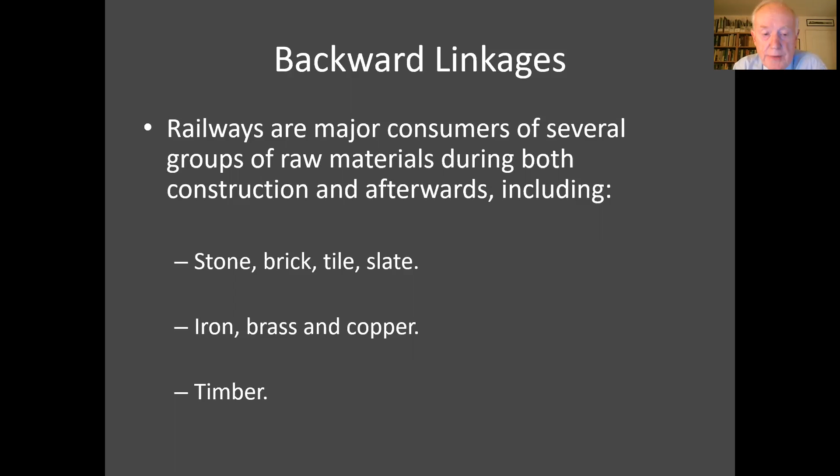Obviously, to an audience of railway engineers and other engineers, the next few points will seem very obvious. These slides were ones which I used for a lecture to a lay audience some months ago.

Just to run through very quickly the sort of uses to which timber was put, mainly up to the First World War. I could have added as a subtitle to this talk that I'm mainly talking about the period up to 1914, 1918, or the grouping of 1923. But until the First World War, railway carriage bodies were built principally of timber, with under-frames switching to iron or steel at a rather earlier date. So you get oak frames, pine or teak cladding to railway carriages, and then the use of small but relatively expensive quantities of hardwoods, decorative hardwood veneers, inside carriages, particularly first-class carriages or special carriages.

Likewise, on a greater scale but less glamorously, the majority of wagon underframes for at least the first 30 or 40 years of mainline railways were built of timber. Gradually, iron or steel replaced timber in underframes, but the Railway Clearinghouse was still issuing a model drawing for a timber wagon underframe up to 1923.

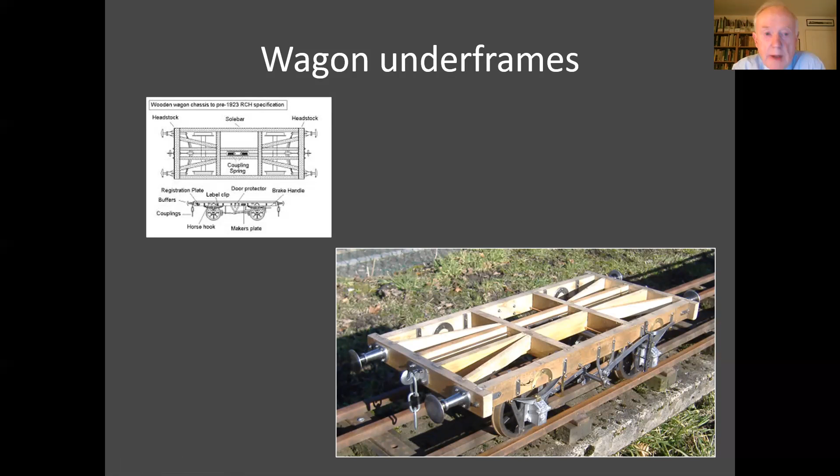The superstructure of wagons was again predominantly timber until well after the First World War. In fact, you had hundreds of thousands of open wagons built - 3, 5, 7 plank wagons - using normally 2-inch pine as the planking material.

Different kinds of covered wagon, covered van also used timber for panelling, again usually pine panelling over an oak frame, even if the underframe had switched to channeled steel as a method of construction.

More commonly, signal boxes were either built entirely of timber framing with timber cladding, or in some cases the ground floor was built of brick or stone, but the cabin itself was built of timber. That's an almost completely new industry - there is no real parallel before the railways arrived for using timber framing for these kind of line-side buildings. The next slide gives some more examples.

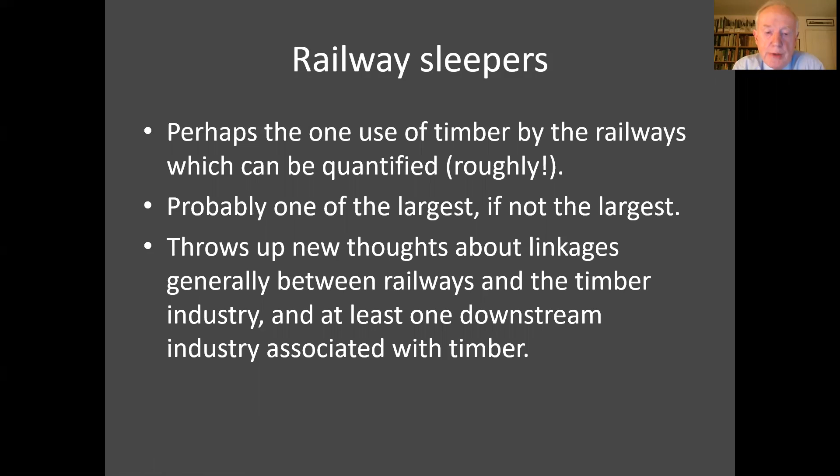Sleepers may be the largest, if not the largest, use of timber by the railways. This does throw up new thoughts about linkages between the railways and the timber industry, an industry which expands greatly in the 19th century. I'm also going to bring in towards the end one downstream industry associated with timber, principally through the use of timber for railway sleepers.

So if you're trying to measure sleeper consumption, I felt there were 5 variables which you have to try and estimate, not necessarily measure, but at least estimate. One is the ratio of route mileage, which is well recorded, to track mileage. Then you need to measure the annual increase in track mileage. You then have to decide how many sleepers per mile were used in the 19th century, what was the average life of a sleeper, and how many cubic feet of timber went into a sleeper.

Now, I suspect some of those variables are covered by British standards today, or certainly by custom and practice. They vary a good deal more in the 19th century, so it's not a case of just looking up the latest Network Rail manual on how to lay track. There is a bit more to it.

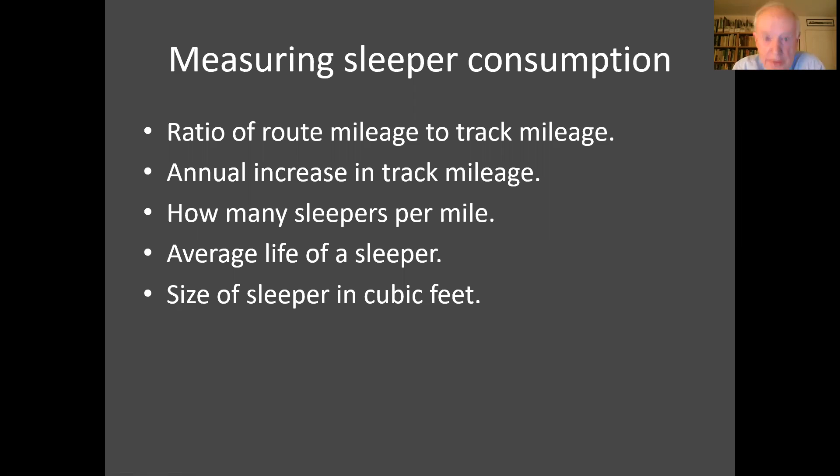I'll look at each of those in turn. So route mileage figures have been recorded for the railways from the 1820s. In fact, you can reconstruct figures back to about 1800. But the mileage of multiple tracks was only recorded from 1910, when there was a revision in the way railway statistics were collected.

That year, just under 20,000 route miles of railway contained just under 35,000 track miles, which is a ratio fairly close to 1 to 1 3/4. The question is, can you project that backwards to the beginning of the mainline railway in the 1830s?

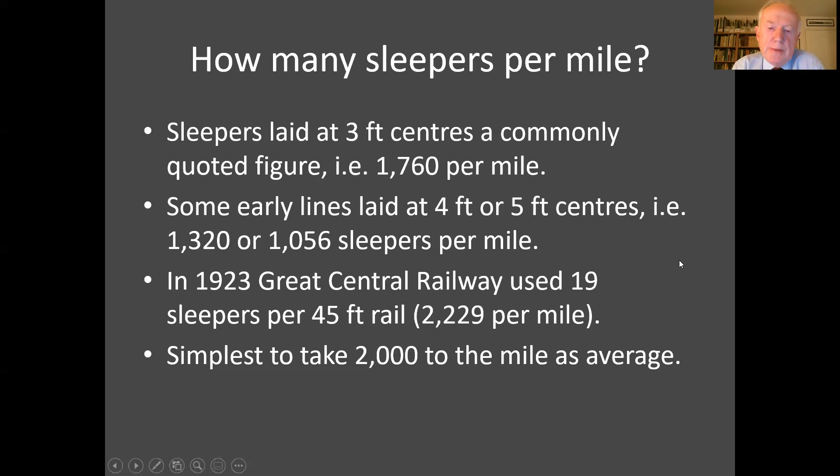How long do sleepers last? In this case, again, a considerable variation. There was an inquiry carried out not by one of the British engineering institutions, but by its American counterpart, the American Society of Civil Engineers, in the 1880s. They collected a huge amount of information from British companies, which reveals a considerable variation.

The Midland Railway reckoned that what they called a well-creosoted sleeper lasted over 20 years. The Great Northern quoted half that figure. The Lancashire and Yorkshire said midway in between. The Manchester, Sheffield and Lincolnshire, perhaps most sensibly, said it varied depending on how heavy the traffic was.

So it's a case of taking your pick somewhere between 10 and 21 years. What I have done in this case is use a replacement rate of 6%, which gives an average life of 16 2/3 years per sleeper. Obviously, sleepers could be cascaded from mainline use to siding use to private line use. They were also used as fence posts second-hand, and sold as firewood. So there is a slight recovery of outlay, but I think a 6% replacement rate probably works reasonably well.

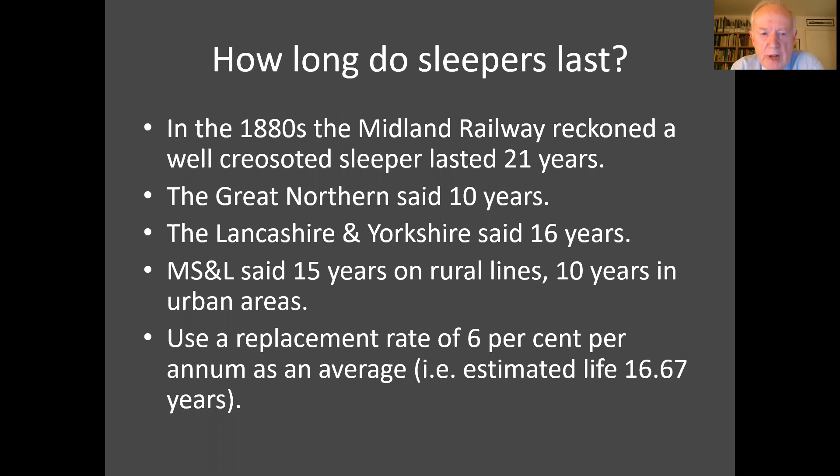Next slide, please. Then, again, a question which could no doubt be answered in a moment from a 20th century textbook: how much wood goes into a sleeper?

The standard timber sleeper size, 9 foot long, 10 inches wide, 5 inches deep, seems to have settled into general usage by the 1880s. Before then, thinner section sleepers were used, and references to these tend to turn up in accident reports from the Railway Inspectorate when they say that this company is not using substantial enough sleepers. Some early companies used triangular sleepers, where you started off with a 13-inch square sleeper block, and instead of slicing it in half, you cut out 4 triangles from it. That again saved on timber.

And a very few lines in Britain, far more in North America, used half-round sleepers cut from logs, usually specified as having a minimum diameter of 9 inches at one end and 10 inches at the other. I've worked out the cubic footage of each of those types of sleeper. What I've settled with is the familiar one from the 1880s, the 9 by 10 by 5, which uses 3 1/8 cubic feet of timber. The relevance of that cubic measurement will become apparent in a moment.

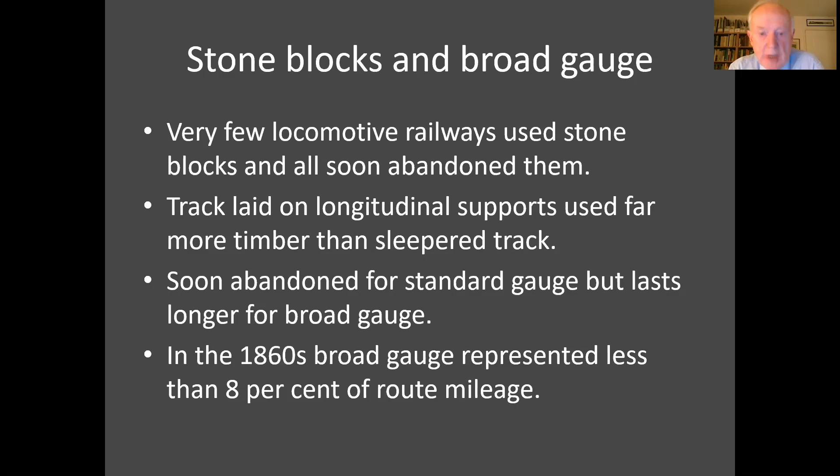Next slide, please. So how much wood goes into a sleeper? Broad gauge track, which is disproportionately well documented in engineering institution proceedings, uses about 5 cubic feet of timber. Standard gauge track on longitudinal bearers uses about 3 cubic feet. And as I said a moment ago, I've taken 3 1/8 cubic feet of timber as the average timber per sleeper, because if you multiply that figure by 16, you end up with 50 cubic feet.

And 50 cubic feet was the standard measure of timber in the timber industry until they switched to cubic meters. It was known technically in the industry as a load, a term with that technical meaning until metrication in the 1960s. So I suspect most railway companies, if they were ordering enough timber for so many sleepers, after allowing for a bit of wastage, reckoned that a load of timber would produce 16 sleepers, possibly somewhat less with wastage. So that's the reason for taking that figure.

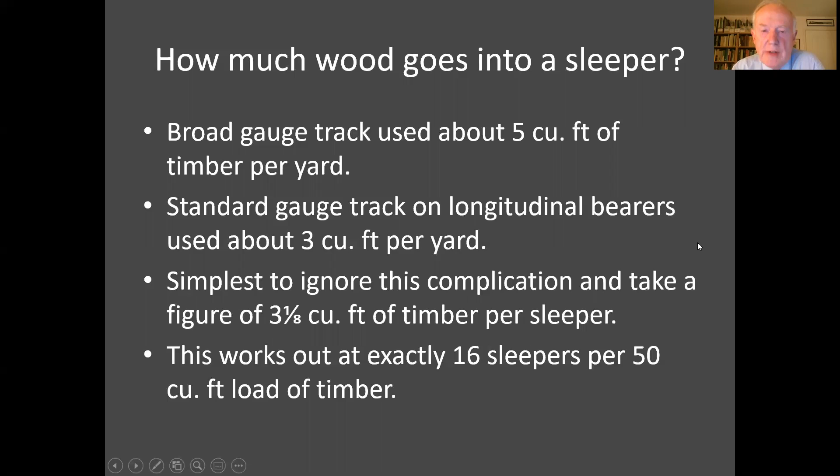Next slide, please. Now, if you take answers to those 5 variables which I've tried to work out, you can then estimate, and I say estimate, not measure, the consumption of sleepers on British railways, which I've done here from 1840, the beginning really of mainline railways of any length, up to just before the First World War. I've separated the consumption into 2 categories: one is the use of timber for sleepers on new lines, and the other is replacement timber. I think the most striking result of this, admittedly fairly simple diagram, is to show that even by 1840, sleeper consumption was over the 2 million mark. It goes up during the railway mania.

The 1850 figure reflects schemes promoted during the mania, which were still being built around 1850. Thereafter, there isn't an increasing consumption of timber for sleepers as you might expect as the network got bigger, nor is there a drop. You might think once sleepers were put down they could be left for years, but they couldn't—they were a consumable item rather than a fixed capital asset. Consumption never went far above 2.5 million sleepers and is remarkably stable.

As route mileage increases progressively more slowly, the consumption of sleepers for new track goes down. But as the network grows bigger—single lines doubled, double lines quadrupled, more sidings and private branches built—the use of timber for replacement sleepers actually goes up. The net result is a fairly stable picture between 1840 and the First World War, not varying much between 2 and 2.5 million sleepers per year.

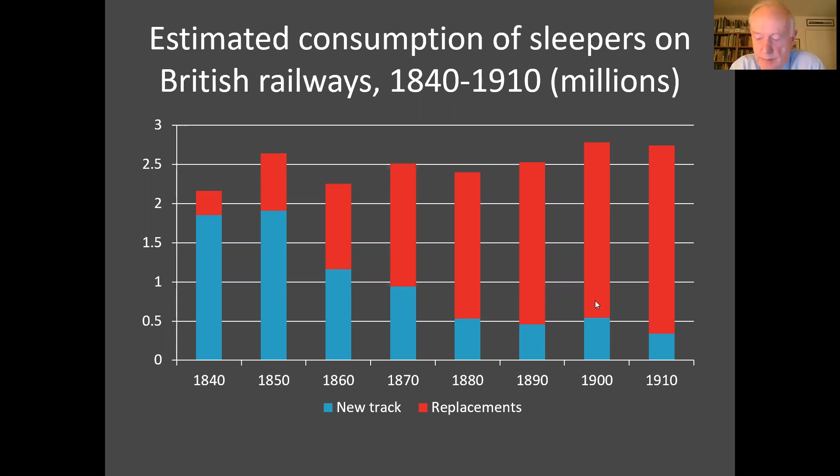So, to sum up, by the 1860s more sleepers were being used to maintain existing track than to build new ones. This meant demand for timber continued after the network had been built. Whereas, once you'd built a given number of stations out of brick, stone, tile, or slate, that expenditure stops. So sleeper timber is a consumable, not a one-off capital purchase.

If you convert the millions of sleepers into loads of timber, the measurement the timber industry would have used, I estimate about 150,000 to 155,000 loads of timber—that's 50 cubic feet each—were used annually by railways in Britain between the 1840s and the First World War. Next slide, please.

Now, the obvious next step with any study of the relationship between one industry and another is to ask what proportion of total output one industry's demand for another's products represents. And this is where you hit something of a buffer, I'm afraid.

The timber industry, despite its importance in 19th century Britain, is very poorly documented. The structure of the industry is known in outline, but there's a lack of statistics, and a complete lack of statistics of domestic production. The industry was divided conventionally into four groups: shippers, who shipped timber from overseas; brokers, who arranged its sale once it reached Britain; importers, merchants who only handled foreign timber and didn't supply consumers directly; and merchants, who could deal in homegrown timber, imported timber, or both.

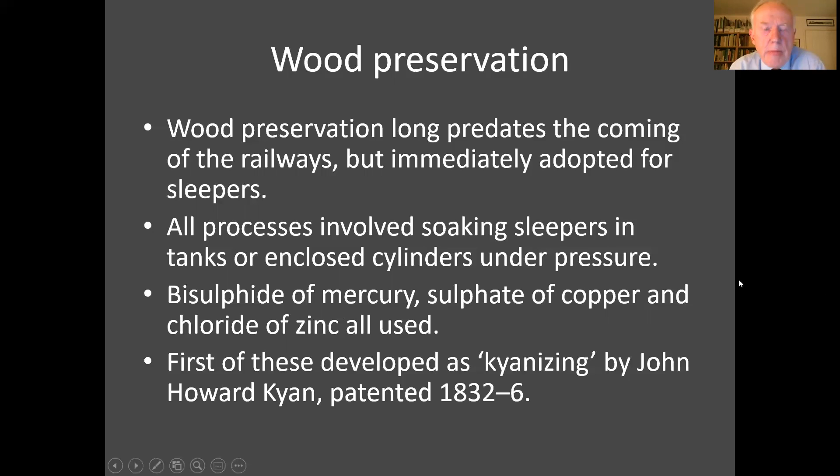This seemed like a good idea, but it fell victim, first of all, to the chemical problem that if kyanized timber came into contact with iron, it rotted, which made it more or less useless for the railways.

But also, Kyan tried to expand very rapidly in Britain by working through a franchise system. And as newspaper reports said, some agents were much more efficient than others in how they operated the machinery. And gradually, railway companies came to realise that it was probably better to do their own preserving using their own plant. That remains the case after kyanizing has been abandoned.

The process that eventually does become successful is the use of creosote. Creosote was first recognised as a separate product in 1834. The term is used, perhaps unfortunately, for a vegetable-based material and also the coal tar derivative, which is what I'm actually talking about. It was produced initially as a byproduct of making gas from bituminous coal.

The crucial early patent is John Bethell's of 1838. Unfortunately, because this was obviously a highly flammable process, his business never recovered from a disastrous fire in London soon afterwards. The largest company in the business was what was called Burt, Boulton and Haywood, founded by Mr. Burt and Mr. Boulton in 1850, which becomes the largest creosoting business in Britain. The company also integrates backwards into timber importing. They were a very large firm of timber importers till after the Second World War.

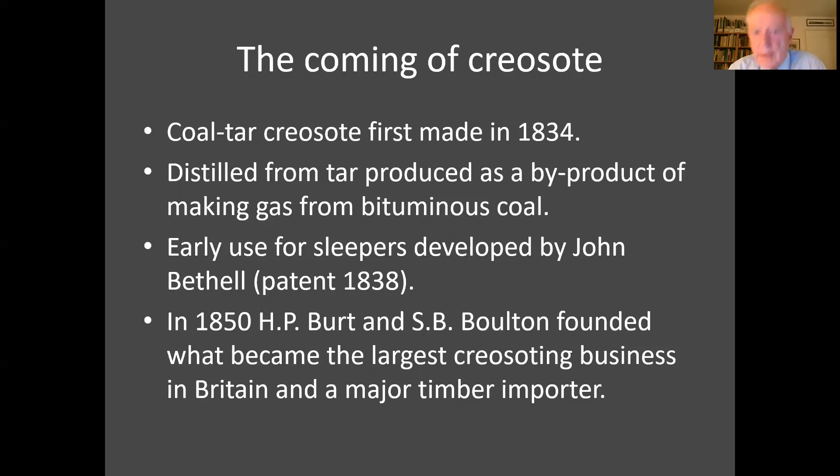Creosoting was adopted steadily rather than rapidly by the railway companies. Some pointed out that railway sleepers wore out mechanically so quickly that it wasn't worth the extra cost of prolonging their life in a chemical sense. But by the 1880s, again, I'm relying here on the American Society of Civil Engineers survey of British railway use of timber, creosoting was more or less standard.

All the larger companies built their own works. Any textbook on this operation insists that outside suppliers could too easily adjust the quantity of creosote being put in the sleepers, and that for a satisfactory product, the railway companies should do their own creosoting. So most of the larger companies did erect their own creosote works.

What's striking about these, and this again illustrates the fact that by this stage sleeper timber was being imported, is that nearly all these works are either at ports, or in the case of railway companies that didn't have any port terminals, they're on inland water, so that the timber arrives by water, but once it's been turned into creosoted sleepers, it leaves by rail.

The plant soon becomes very standardized. I'll show some pictures in a moment. The standard operation was to use a cylinder about 70 feet long, 6 foot diameter, which took one load of timber. The sleepers were pushed in on little bogies on a narrow gauge tramway. A vacuum was then created using a steam engine. The steam was also used to heat the creosote to make it go into the timber more easily.

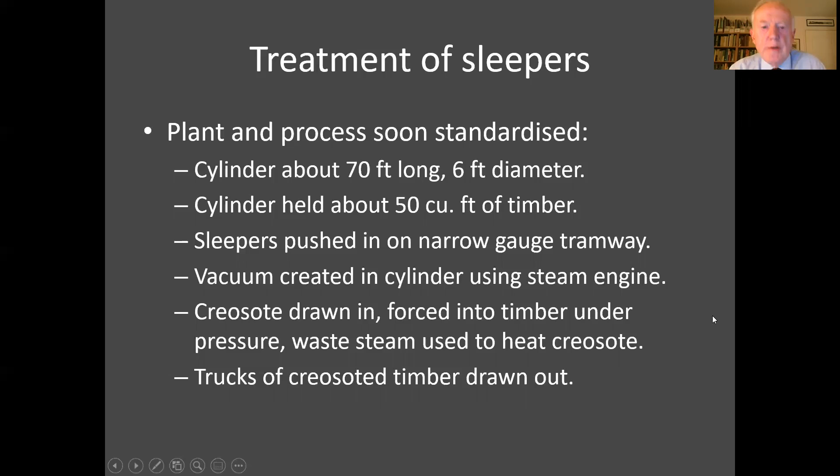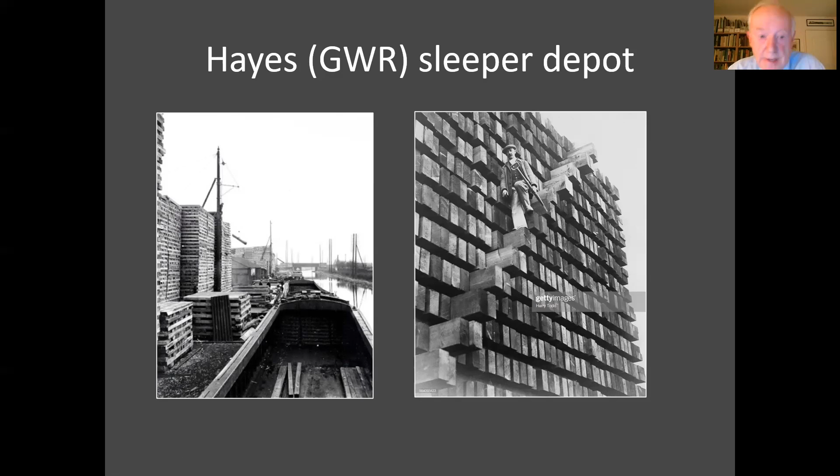This is from one of several photographs from Burt, Boulton & Haywood's Centenary History, published in 1950, showing a row of 3 creosoting cylinders, 2 of them with the door open, and you can see the narrow gauge tramway going in, on which the sleepers were pushed on little bogie wagons.

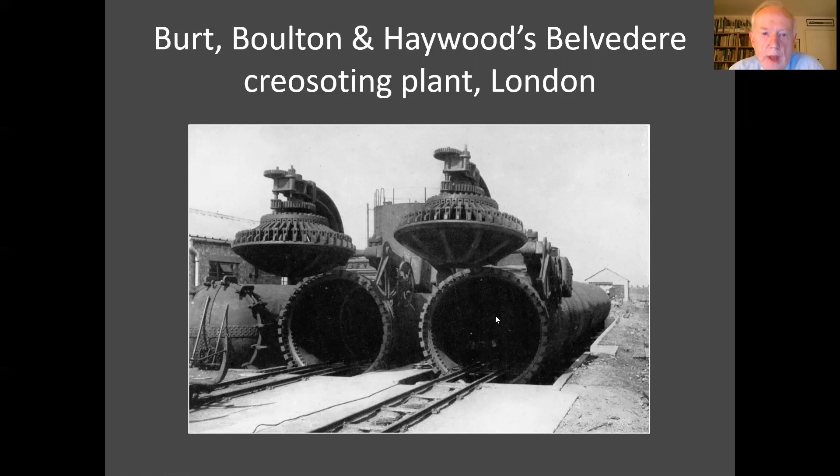This is their Newport, Monmouthshire works. There you can see on the left a load of sleepers about to be pushed into the tank. They were arranged so that you could pack as many sleepers as possible in, and that should be one 50-foot load of sleepers waiting to be creosoted.

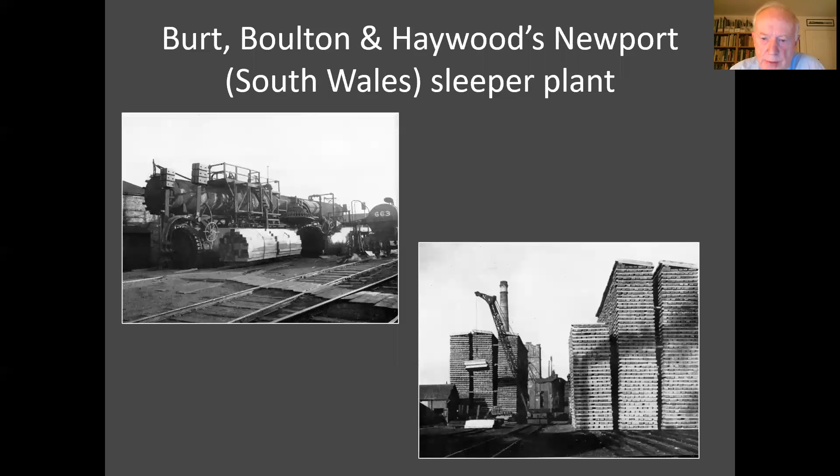In this case, you've got tanks with the creosote erected above the cylinders. The creosote was then dropped down into a tank below the cylinder and drawn up by the vacuum. On the right, enormous piles of sleepers, either waiting to be treated or waiting to be shipped off onto the railways.

From West Hartlepool on the North Eastern Railway, same sort of picture. On the left, there's a man breaking up the blocks of sleepers after they've come out of the creosoting process, and you can see a load just going into a tank. On the right, similar picture of the yard with sleepers being loaded onto flat wagons.

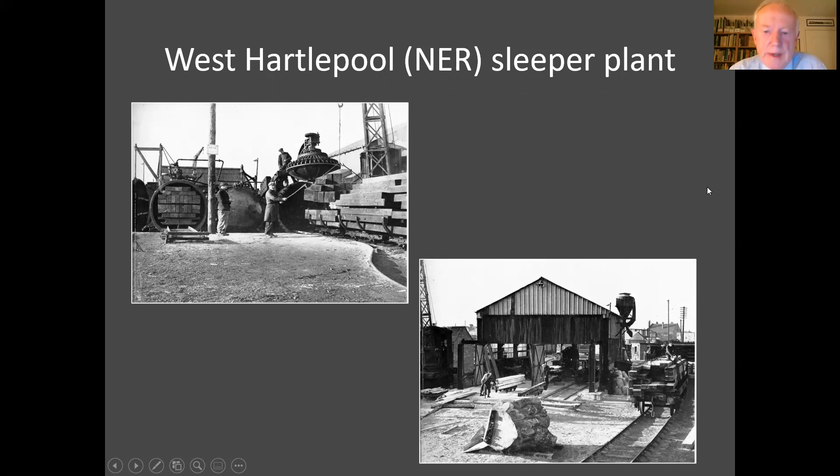Another picture of this is from Burt, Boulton's Southampton yard, with a truckload of sleepers being pushed into the cylinder. It was not, I suspect, a particularly healthy occupation if you were standing there with creosote fumes all around you.

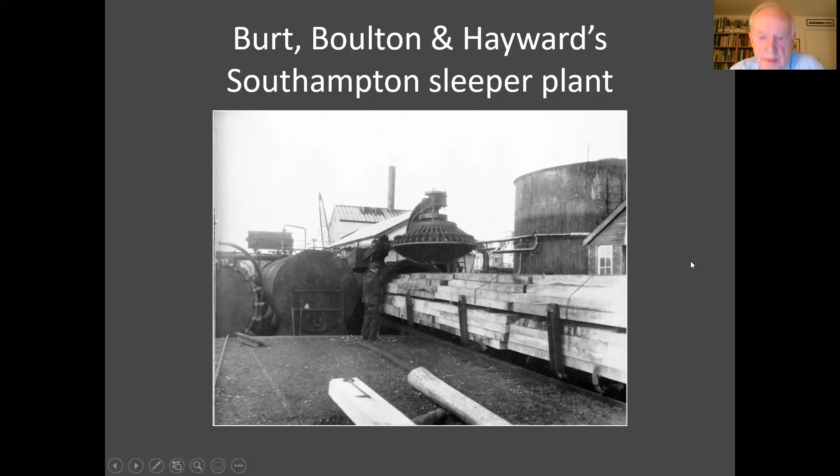So, creosote and the railways. Let me again conclude with one or two estimates rather than exact figures. From various sources, I would say on average 2.5 gallons of creosote was used per sleeper. So if you're creosoting 2.5 million sleepers a year, you use 6.25 million gallons of creosote.

In fact, the railways and indeed the independent creosoting companies would have used more than that, because some other types of railway timber, I've given 2 examples there, would also have been treated to make them last longer. And the post office also creosoted its timbers.

There's a rather entertaining report of the discussion following a lecture, I think it's at the civils rather than mechanical engineers, talking about creosoting, and the surveyor to the post office stood up and said, I'm afraid Her Majesty's telegraph poles have been rather insulted in this lecture, so I want to make it clear that we also treat our telegraph poles with creosote as well, and they last a very long time.

So let's say in round figures, about 7.5 million gallons of creosote was being used by the railways around 1900. Can you compare that with the total output of creosote?

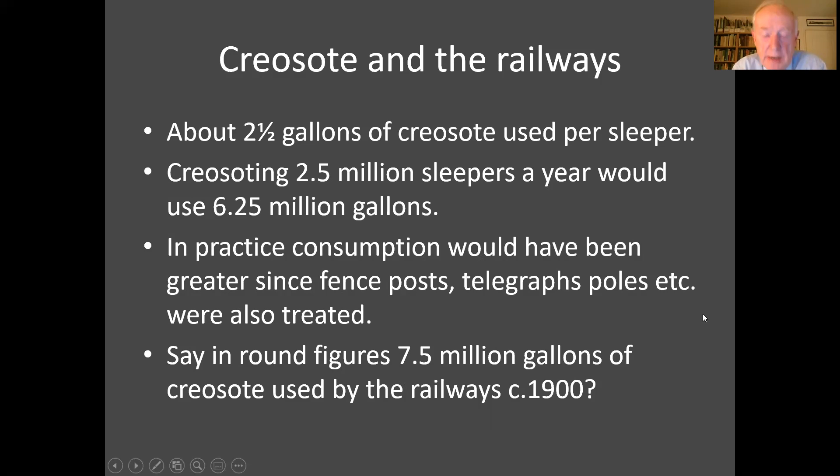Unfortunately, you can't, because creosote is one of those industries, again, not very well recorded. I've found one isolated figure that in 1890, output of UK creosote was the improbably precise quantity of 29.9 million gallons a year. Why it wasn't 30 million gallons, I'm not sure. If that figure is roughly right, the railways were then consuming about 1/4 of all the creosote produced in Britain.

Official figures only start in 1907 with the first census of production, by which time output was found to be nearly 70 million gallons. And if you use that figure for 1907, the railway's market share comes down to about 11%, which is obviously a lot less than 1/4.

The other figure that began to be collected after the first census of production was the quantity of creosote exported, mostly to the United States. Between 1908 and 1913, when the trade is disrupted by the First World War, exports were running at about 30 million gallons a year.

So that leaves around 36 million gallons for domestic consumption. There are no imports of creosote, so that's the total quantity reaching the home market. That then raises the railway share back up to about 20%. Quite a lot of the exports may well have gone into railway sleepers, but in other countries.

You can in fact make rough estimates of creosote production going back to 1882, using figures for the quantity of coal used for gas making. Until 1882, there are very few figures for how coal was consumed in different markets. From 1882, there is an attempt to do this, and one of the industries counted was coal used for gas making. Using elementary textbooks, I've decided that a ton of coal produced about 11¼ gallons of tar.

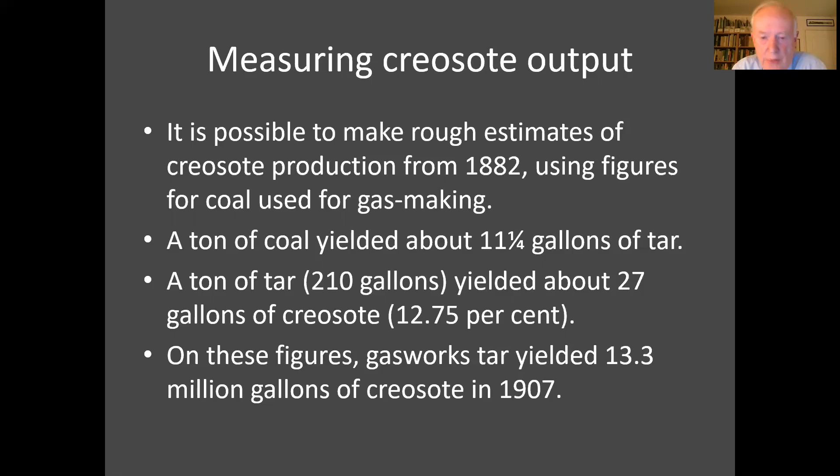Next slide, please. Total creosote output as measured by the Census of Production in 1907 was 66.6 million gallons. If gasworks tar produced 13.3 million gallons, 53.3 million gallons must have come from the other source of tar, which is coke oven tar.

The first byproduct recovery coke ovens were built to serve the steel industry in 1882. So I've estimated the total output of creosote made from coke oven tar as a residual, working from the figure I've actually got, the real figure, for creosote made from gasworks tar. Go to the next slide, please.

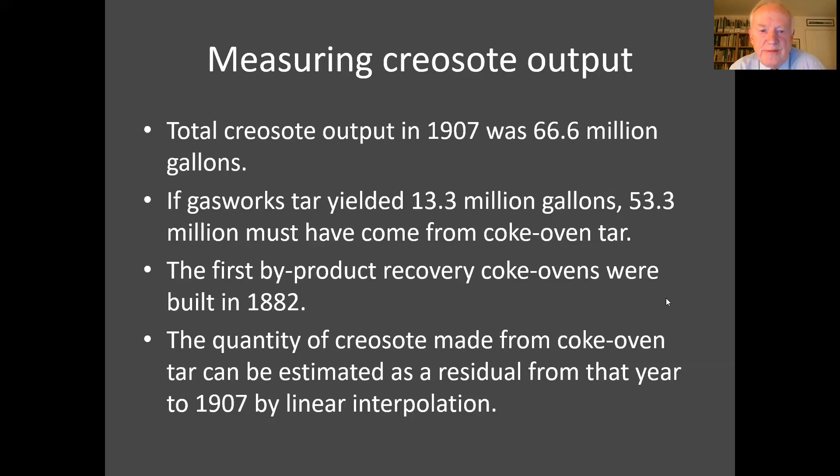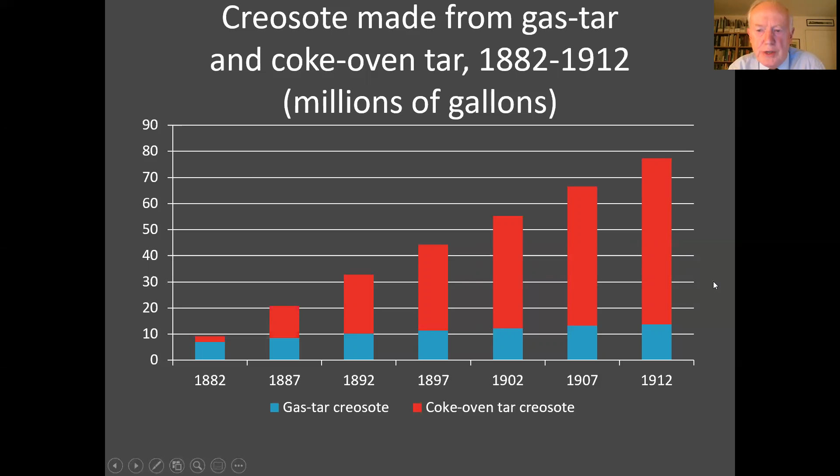And so again, you can produce a simple diagram which shows that gas tar creosote doesn't go up a great deal in quantity from 1882 up to the First World War. The real growth of the supply of creosote to the market comes from coke oven tar, that is, coke ovens of the more sophisticated sort, the recovered byproducts introduced in 1882 and then spread very rapidly through the steel industry and to some extent independently as well. But by and large, these coke ovens were producing for the steel industry. And that gets you up to a figure of about 70-odd million gallons of creosote in total made just before the First World War. Next slide, please.

So if you then estimate the amount of creosote used by sleepers, starting from my figure of around 2.5 million sleepers a year being produced, then you can see, in fact, the railways are a small and declining market for the creosote industry. The real expansion comes from other markets, and as the short series of export figures for the period up to the First World War shows, quite a large part of the total output of creosote went overseas.

If you take out overseas consumption, then the railway's percentage share of the market is rather larger. But again, I think the important point to stress is that this is a new market. And so I suspect one of the reasons why creosote production increased so much in the 19th century was because it was used by the railways to preserve sleepers.

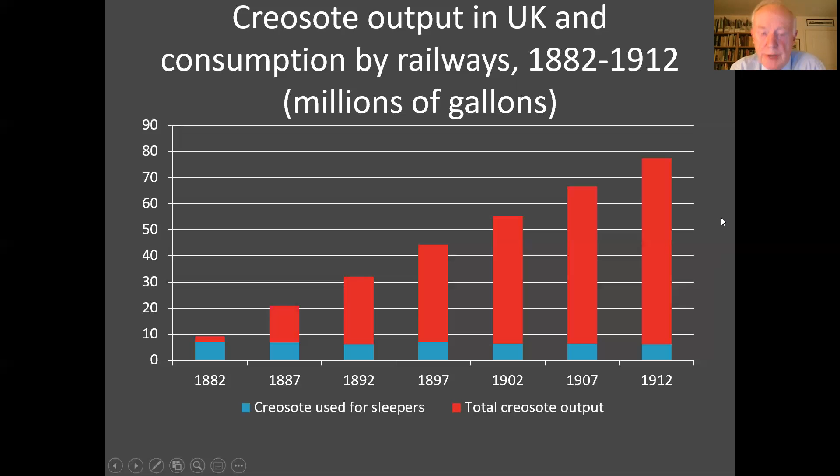Next slide, please. So coming to some conclusions, stressing always, as with any kind of 19th century economic history, that you can't really be precise. The railways become major consumers of timber between about 1840 and the First World War. During that period, the railways probably used about 2.5 million sleepers a year. Demand initially fell on both homegrown and imported timber, but by the middle of this period, probably the timber was coming almost entirely from the Baltic, to a small extent from North America.

Next slide, please. You can't relate sales of timber to total timber sales because there are absolutely no figures for domestic timber production. It's as simple as that. They're not going to jump out of the woodwork, excuse the pun. It's one of those industries where there was no attempt to measure output until, I think, the 1950s. But what you can say is that annual sales of timber for sleepers must have been around 150, 155,000 loads.

It is possible to extract or compile a series of figures for imports of timber. I haven't as yet done that. It's something I'd like to work on further. It's not straightforward because timber arrives in Britain in a variety of different forms, mostly measured in loads. Hardwoods tend to be measured in tons. And the only existing history of the timber industry effectively throws up its hands in despair and says you can't produce any series from this data. I think you can, but I've not yet done it.